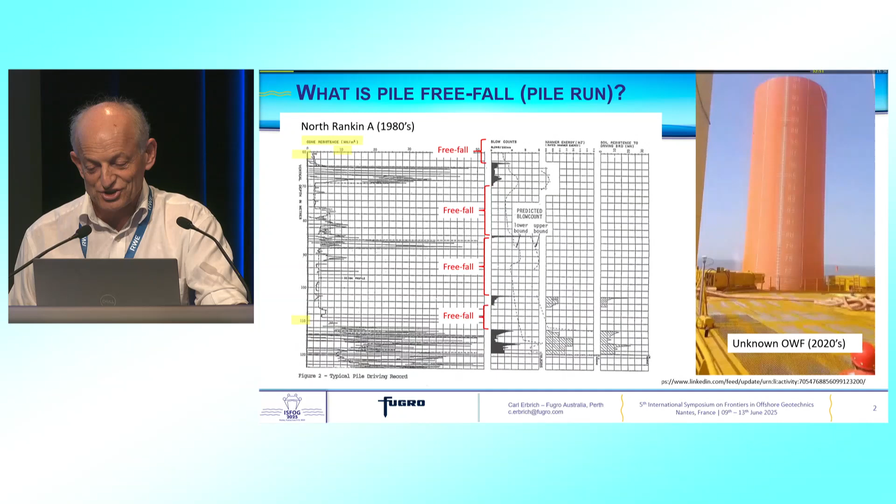Plus, of course, more recently we've been having these monopiles. Now, I don't know where this one is - it just appeared on LinkedIn without any reference. So I'd be fascinated if anybody knows where this one is.

Of course, we've seen other pile runs as well. This one was presented - I think a couple of papers mentioned this, one just a few minutes ago, and also one yesterday, which I've just borrowed these slides from. This was sort of not a free fall in a sense, it was more like a dropped pile, but it was essentially the same mechanism where a pile was unintentionally released and it went in an awful long way further than people would have expected if they just looked at a standard SRD.

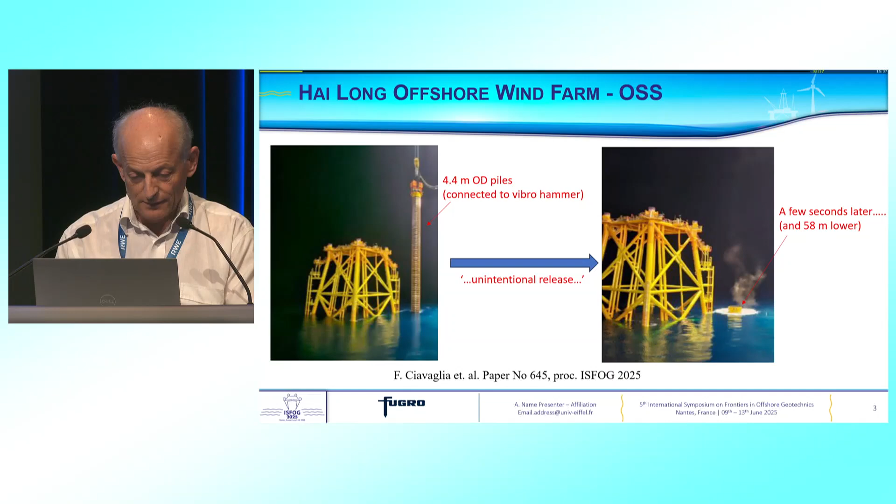So why do piles free fall? Isn't it obvious at the end of the day? Well, if we've got a strong layer overlying a weak layer and the strong soil can support the pile but the weak can't, then we go to free fall. Once we've managed to penetrate through this hard layer, it will drop from there. And in essence, this is very similar to what you might get with a punch through on a spud can.

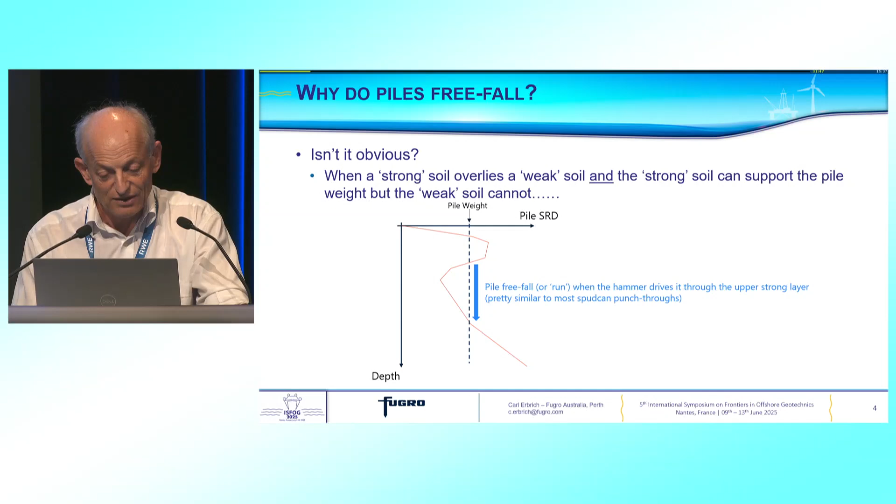So it's nothing difficult. It should be reasonably easy to identify, and it should be reasonably easy to address as well. But then we get to the more interesting situations, which is like this.

If I were to show you these in the abstract, there's no axes deliberately, they're conceptual sketches, but I've given you here 3 different CPTs. If I just gave you those CPTs and asked, do any of them look like a free fall will occur? You'd probably say, well, no, they're all increasing with depth, why would I get a free fall? But I've given you a clue here: this one, no, this one, no, but the one in the middle, yeah, maybe.

And the one in the middle is because it's a partially drained response. A partially drained response in a CPT is basically going to mean a transitional soil, which means a silty sand, a sandy silt, or a silt. So if you see those words anywhere in your profiles, they're the sorts of things that should be your first warning to start looking.

Now, in the real world, we don't tend to get nice, simple, straight lines, particularly in a transitional soil. It's more likely to be a wiggly blue line like this, going up and down. It will have some low points and some high points. But ultimately, the lower points will be more likely to be the more undrained parts of that profile, and the higher points will be the more drained. And of course, CV can vary dramatically, so quite small variations can lead to quite variable responses.

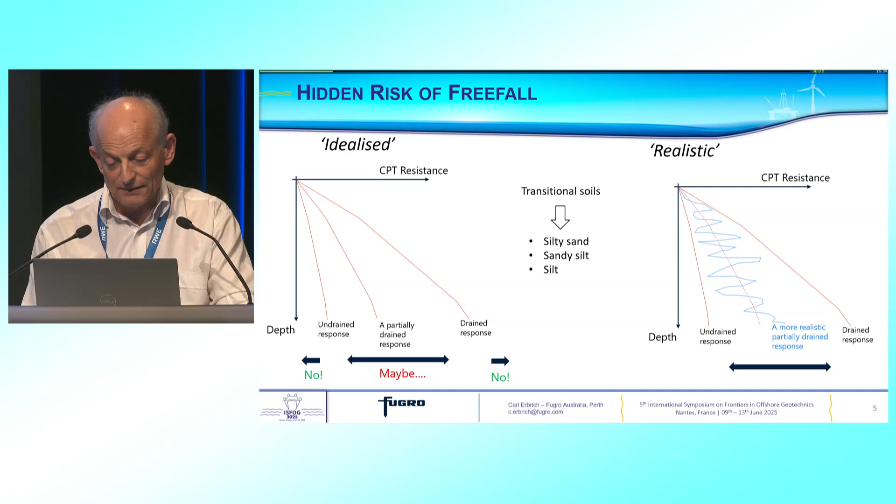So that's more likely to be what we'll actually see. But still, there's a net increase with depth, although there's some highs and lows. So let's go through what a traditional thinking of what freefall might mean on this sort of profile.

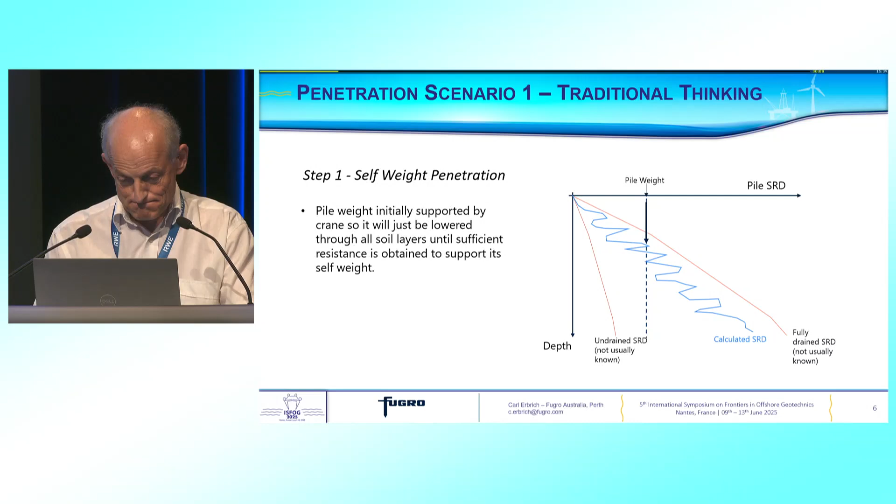So firstly, if we look at self-weight penetration, well, we would lower the pile, it would reach the point that we see here, and it should stop. Now, that looks pretty a precarious point, I have to say, but that's what it would happen.

Now, if you added the hammer weight, which is going to add a lot of extra weight, well, straight away, it would drop through there, so you'd get a very small free fall, and you'd say, well, so be it. Maybe with a bit of dynamics, it might go a bit further, but still, there's a bit of a significant increase, so it should just drop a small distance and then stop again.

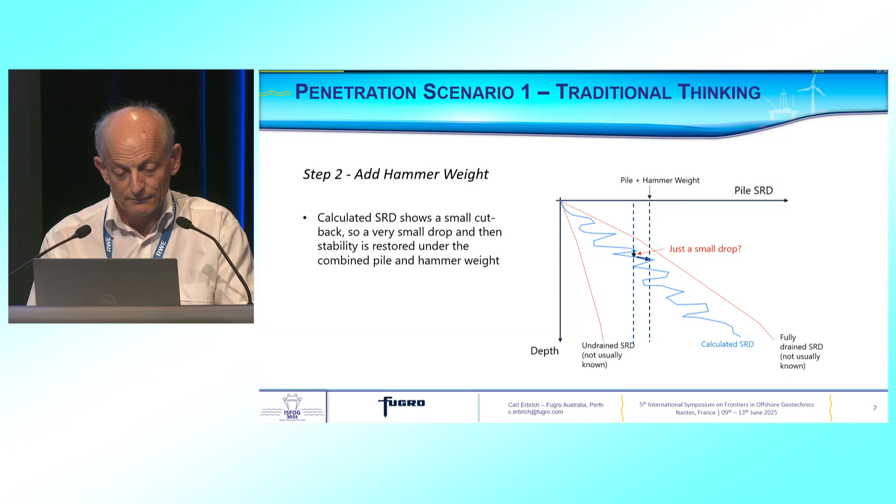And if I carried on, just driving the pile as I ordinarily might drive the pile, you might think, well, there'll be a little small drop here, and then it would stop again, and another small drop here, and then it would stop again. And so be it.

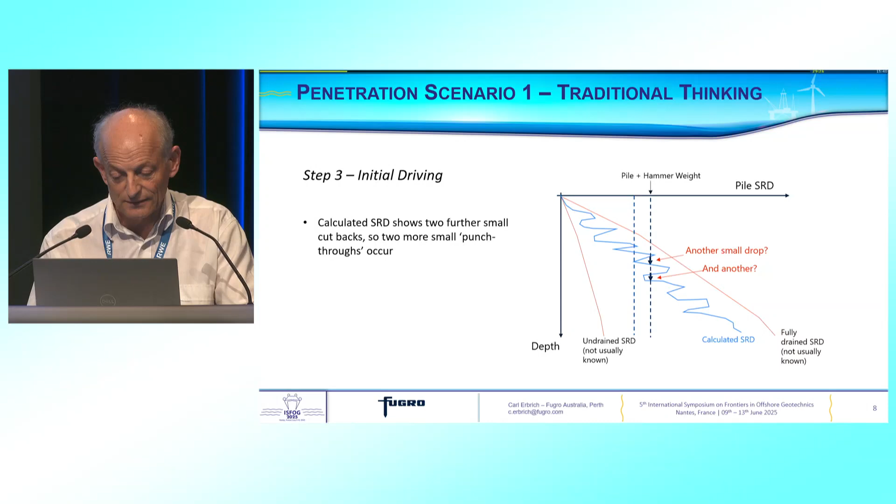And then after this point, really, what's the hazard? The pile and hammer weight is pretty much always below the resistance that we've got once we've got down to this point here. So thereafter, we should just be able to drive nicely into the ground. The calculated SRD is always higher than our resistance, so it should just be a normal operation.

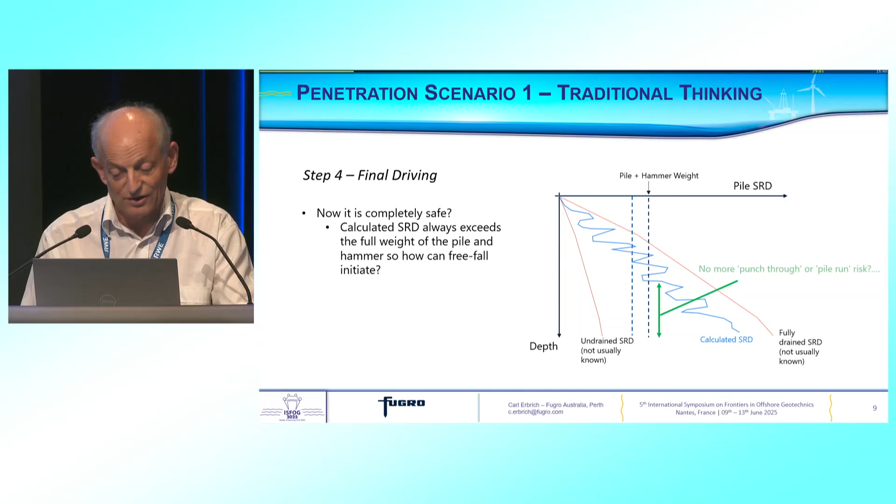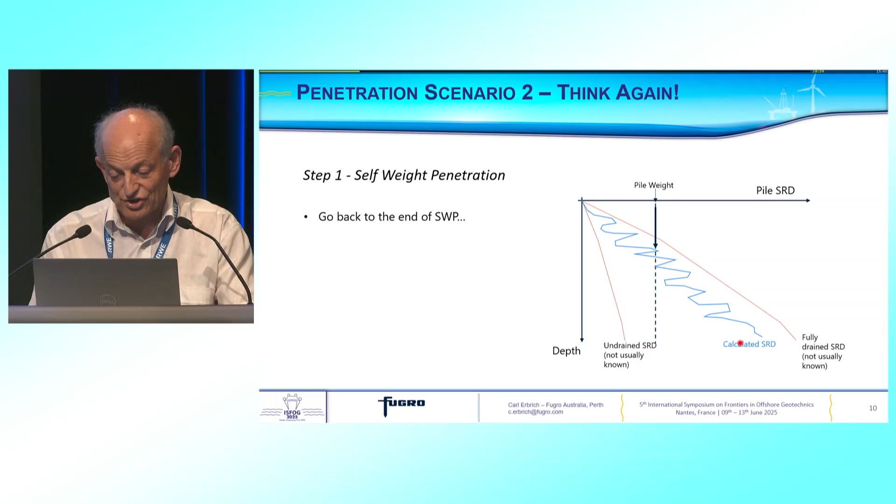Well, maybe not. So let's think again what could happen. So let's go back to the end of the self-weight penetration phase, and remembering that we are dealing with different resistances for undrained at this end of the spectrum and drained at this end of the spectrum, and then in the middle we've got our partially drained, which is going up and down a bit.

So now if we add the hammer weight, what's going to happen? Well, actually, instead of that small drop that I showed you before, that could happen if we get lucky or if we do it slow enough.

However, as we add the hammer and the pile starts to move down, we'll get an increase in the pile velocity. And when we get an increase in the pile velocity, if we're in the partially drained space to start with, then increasing the velocity will change the drainage conditions to a more undrained state. And as we move from a more drained state to a more undrained state, in most cases, that means that the resistance will reduce.

And once the resistance reduces, that means there is now even less resistance available to support the pile than we had before.

And hence the pile moves faster and the resistance reduces more. We're basically in a nasty positive feedback loop, where every bit of speeding up of the pile means that the resistance reduces, and ultimately you get a catastrophic situation with the pile dropping uncontrollably.

And the pile doesn't just carry on dropping uncontrollably till it's hit one of these little bumps in the profile. It is dropping uncontrollably until it goes down to intersect with the undrained resistance, and then some, because by that stage it's flying down at a great velocity with a lot of energy, so it needs extra time to pull up. So it's going to end up penetrating, more likely than not, deeper than this undrained SRD, which is potentially much lower than what you started with, and certainly much lower than a drained SRD.

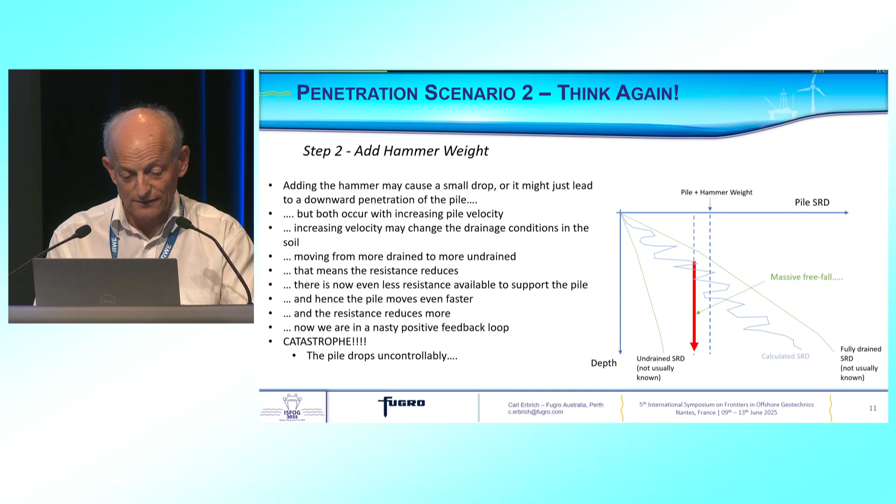So just in a conceptual space, what does that mean? We know we can have graphs with VD on CV - we've seen these going back many years now, probably a couple of decades since this sort of concept was first explored. We can treat that in terms of cones, and we can treat it in terms of pile wall thickness.

We can also treat it in terms of pile shaft resistance as well. All of these have a sensitivity to drainage. So up here we have our CPT, or pile tip resistance, or even our pile shaft resistance, and as we come along we basically run down this curve. So effectively, if we start in this position, we're going to run down, and we're going to fall down the hill, and the only safe space is when we get to the bottom of the hill.

So basically, we're safe against free fall if we're in the undrained space. We're safe against free fall if we're a long way back from the edge of this escarpment, because even if we speed the pile up during normal operations with hammers and lowering and whatever, we'll stay in a safe space. But if we start off quite close to the edge, then we can drop away.

And indeed, this might be one of the most dangerous areas because our CPT might look drained, and in reality it might be drained, but it may only just be drained. So again, you're looking for the silt content. If there's silt content and you're just about drained, then that might still be dangerous.

If you're already well down this chart, well down this slope when you start, the drop is smaller. It's still substantial, but it's smaller. So the closer you are to the bottom of here when you start, the better, or being a long way back from this edge - those are the spaces we want to be.

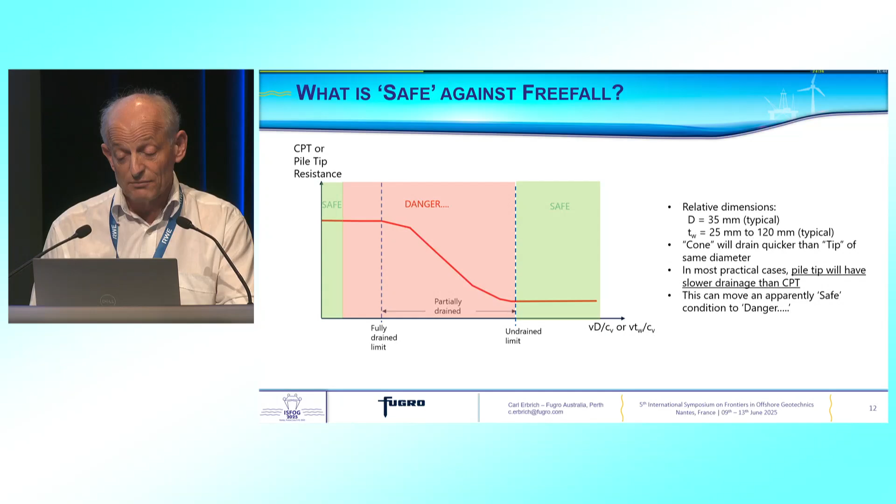So even if our CPT says the situation is drained, in reality our pile tip may start off in a more dangerous position. And this can move an apparently safe starting condition to a dangerous condition.

Now, I've seen around, written in various, mostly LinkedIn blogs, people talking about liquefaction. I had a discussion with someone a couple of days ago that suggested liquefaction is a part of the mechanism. I really don't think liquefaction plays a significant part in what is happening with pile freefall or pile runs.

So let's just revise ourselves what liquefaction means. There's two types of liquefaction. We can have flow liquefaction, which basically occurs when you either have a monotonic response, a stress strain curve that goes up and reaches a peak and then drops away very quickly, and can drop away in the most extreme situation to virtually no strength at all.

And I don't know if you've ever seen, there's some amazing videos online of flow liquefaction events involving dams failing in Brazil, and there is an extraordinary one of a city almost floating down a hill in Indonesia, which is quite extraordinary. It literally looks like it's going down a river.

Well worth checking out if you want to see flow liquefaction. Flow liquefaction can either be triggered statically, or you can trigger it by a few cycles of loading, which bring your strain over, and you intersect here and you drop away, and then it's all over.

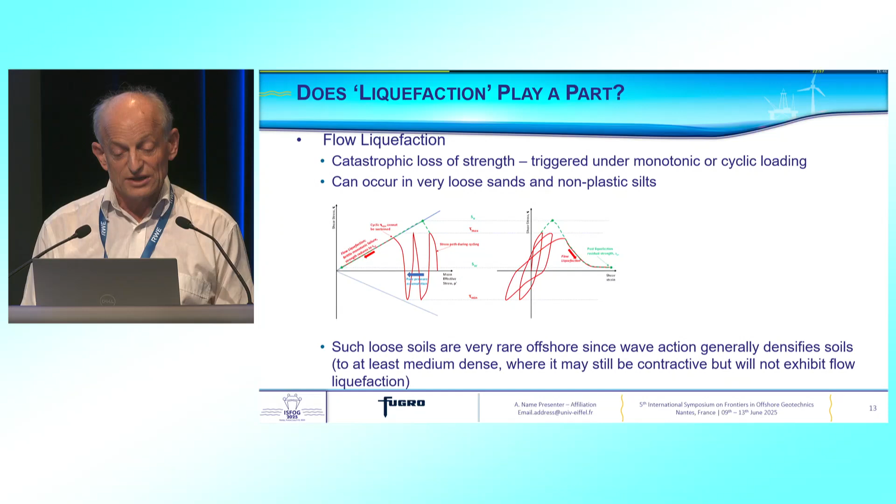That might sound tempting, but the problem is that this only occurs in very loose soils, and loose soil is very rare offshore, since wave action will generally densify soil to at least a medium dense state, not necessarily very dense. In the North Sea it tends to be very dense, but elsewhere we're seeing more medium dense soils. These may still be contractive in the undrained space, but they won't exhibit flow liquefaction where we lose all our strength to virtually nothing. But that can be triggered statically, so it could be relevant in such soils if they existed.

Then there's the more common type of liquefaction we worry about offshore: cyclic mobility. This is where we put cycles onto our soil and have a loss of soil stiffness over a limited strain range, but ultimately the soil strength recovers at large strains. As we cycle the stress-strain curve, it softens to a zero state, which occurs when the stress path goes through this zero state. But it retains dilated capacity such that when you shear it back up again, you still get a high strength.

Now, this mechanism may play a part in triggering a freefall, but it can't really play a part in propagating it, because ultimately, to propagate a freefall, it's a monotonic process. We are free-falling into virgin soil, mostly.

So where we can see a triggering part is that if we're driving in a cyclically liquefiable soil, such as carbonates we have in Australia, or indeed Taiwanese silts, which have become infamous, then you can get an increase in pore pressure with each blow. That will reduce the effective stresses at the pile-soil interface, and this will contribute to initial freefall triggering of the interface degradation.

So we can get gradual degradation. For example, we may have put a pile in, it may have stopped, and then we get some setup. As we start hammering it, it looks pretty solid, but each blow is actually generating pore pressure, and then we'll get to a point where there's been a reduction in effective stress, enough to trigger the freefall.

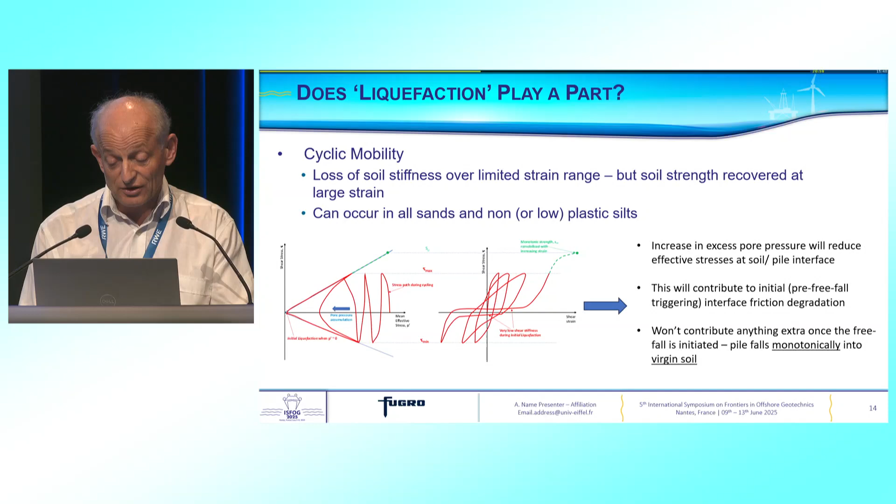But if that was all that was going to happen, it wouldn't freefall very far, because it then moves to a static process going into virgin soils. So it won't contribute anything extra once the freefall is initiated, because in that case the pile is falling monotonically into virgin soil.

However, on the other hand, we have soil remolding. Now, soil remolding we know about in terms of clays, and in carbonate soils we have extremely high sensitivities. So very sensitive soils can remold to very low strengths at large strains. And we need to differentiate here remolding, which is a process where we get low strengths at very large strains, whereas flow liquefaction is something that occurs at much smaller strains.

So actually they look similar. They're both post-peak strain softening materials, but remolding requires large strains to propagate down to very low values, whereas flow liquefaction is essentially an instability that just drops away instantly.

So yes, flow liquefaction is very unlikely to be contributing to freefalls, but remolding and very high sensitivity soils are definitely contributing. And anywhere you see liquidity indices close to or greater than 1 should really be a red flag straight away, because a liquidity index greater than 1 means your remolded strength is probably only a couple of kPa or so.

So we can conduct fall cone tests in fine-grained soils. That's a good test to work out your soil sensitivity in such soils. But then we have the challenge, what about sands? What is even the concept of remolding in sands? We don't necessarily see it in the normal sense of the word. However, when we drop a pile very fast, we get dynamic effects, and then indeed we can have essentially remolding.

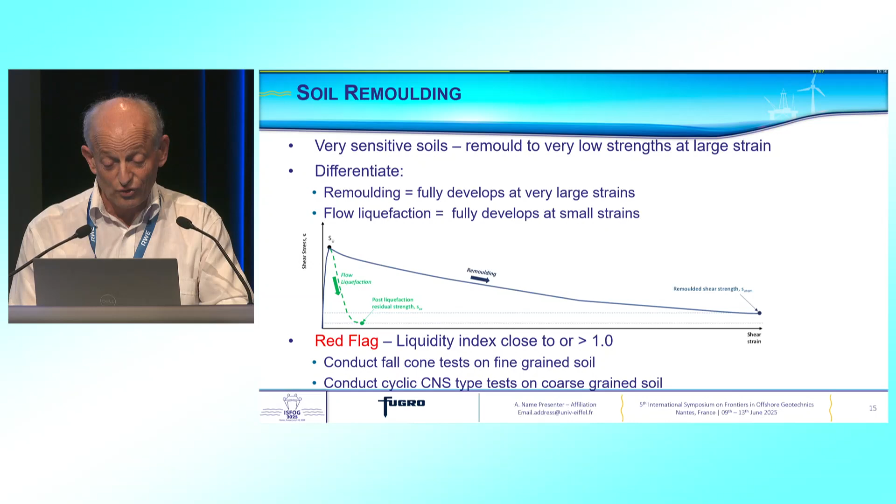So there's some basic ideas about the sort of things to look for. Now I'll talk about modeling of freefall.

There's been a few different models. I think basically they're all the same models I've seen in this conference so far, but there's a couple of differences in what we're doing.

Now, why do we need all that? Well, the reason we need all that is because the sort of piles we have, and indeed even the monopiles that people have been using here, do have some restriction of water flow out the top of them.

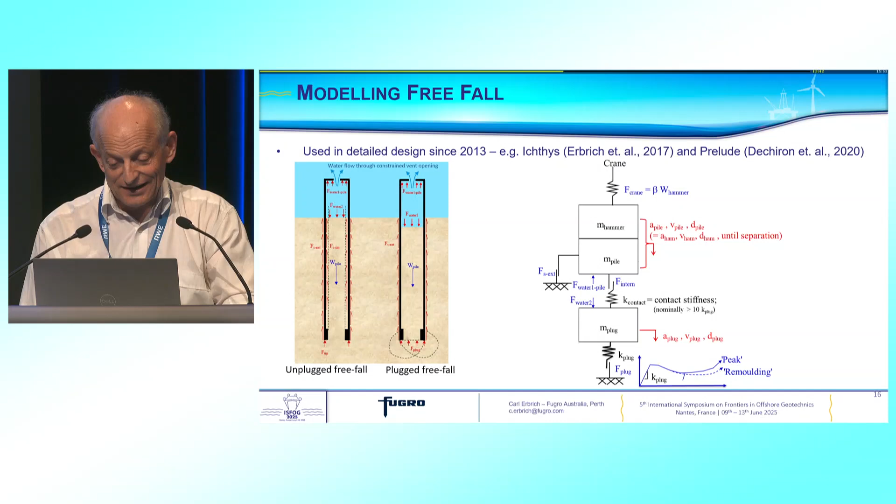We've used this model in detailed design since about 2013. There's a couple of papers, Prelude and Ichthys, which have been in conference. So I have mentioned freefall previously in a couple of examples, although it's only been a sort of a little background topic. Before that time, I don't know what people were doing, to be honest. For NRB, for example, I think there was some simple counts done, but we didn't do them.

We included it for a job we were doing at the time, where we explicitly incorporated this influence. And in very more recent times, following the Taiwanese situations, we have now also essentially incorporated the same process for shaft friction degradation as well.

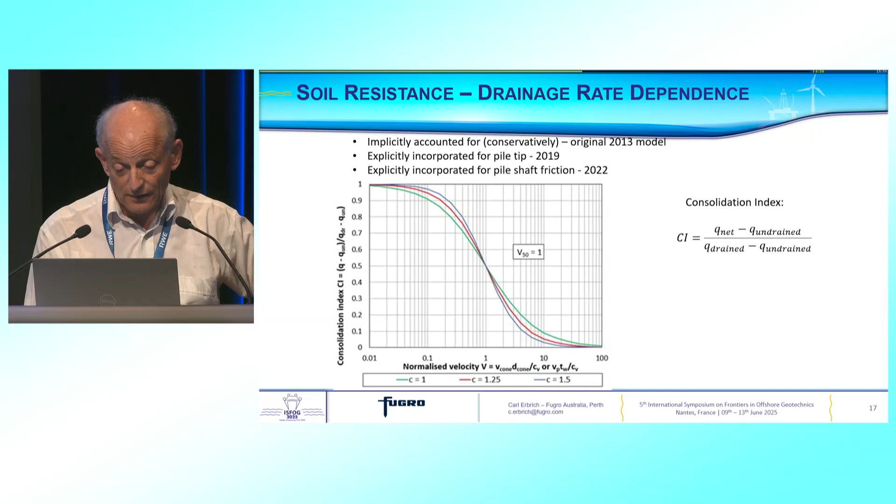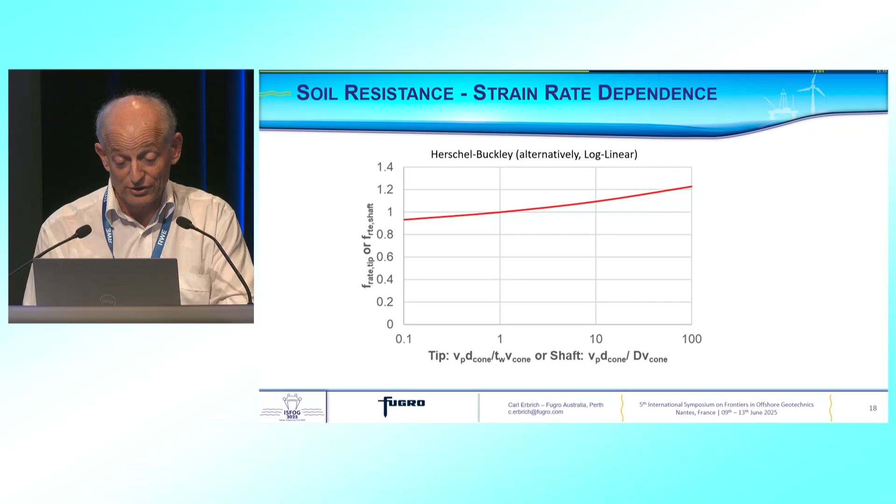We also incorporate strain rate dependence. Sometimes we've used a log linear model, sometimes the Herschel-Buckley model, and it does tend to give you maybe a 20% increase for the end bearing, not such a big increase for the shaft friction. Actually, it can even be a decrease for the shaft friction because of the scale involved.

So let's go to our first example case. This is a monopile in silty soil, essentially a Taiwanese example. This is not a real soil case - we do not have permission to use people's data, but this is a synthetically created profile.

It's in 25 meters of water. In-air weight is about 13.4 meganewtons, and then there's a hammer and sleeve weight of about 5 meganewtons in air on top of that.

And okay, you might ask, well, what's the basis? I keep pressing that wrong button - hold on, sorry, I need to get better control of the buttons here.

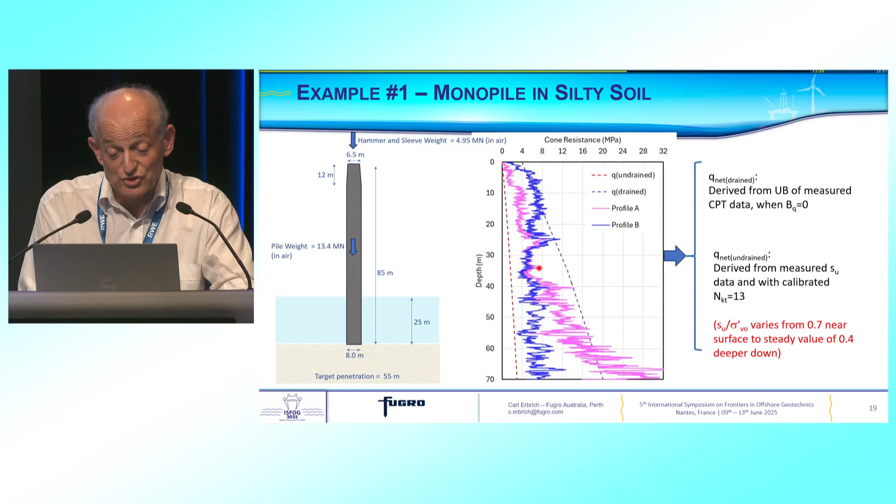Then we've got sleeve friction profiles as well. These are really defined by looking at the peak skin frictions that we use, derived from the CPT sleeve friction. So we've drawn an upper bound line to derive the more drained end of the spectrum and a lower bound line to derive the more undrained end of the spectrum.

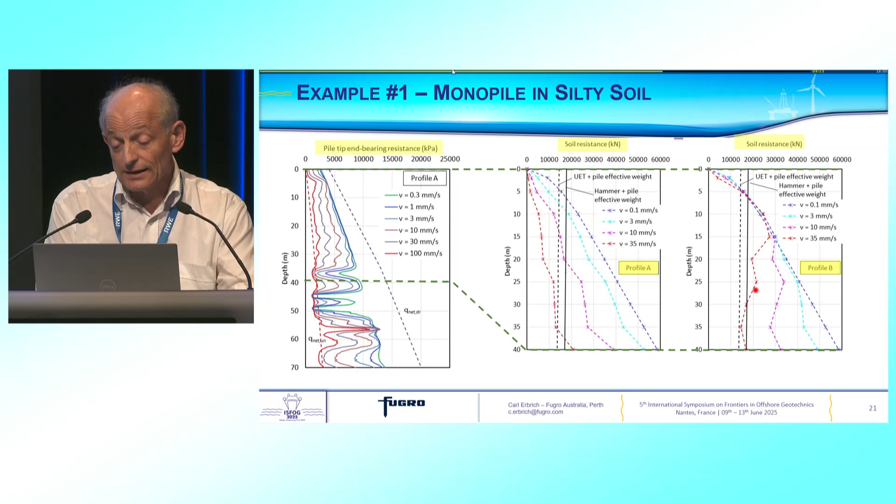That then translates into actual overall soil resistance, including the skin friction. Here we can see different velocities, and here our starting profile: the pile and upending tool weight, and then the hammer and pile weight. If we just looked at these on their own, you'd say, well, as long as I follow one of these lines, all should be good, because they're all increasing with depth. That's profile A. This is profile B, which does have some reductions with depth, but still in this area, all is good apparently, because we just keep following these lines.

If we actually run an analysis with just a very small initial velocity given to these profiles to get them started, this is what we end up with. Profile A, which was softer at the top but stronger at the bottom, actually goes faster, reaching almost 15 meters a second, and about 7 seconds later comes to a halt. Profile B goes a bit slower, 10 meters a second peak, and after 9 seconds it comes to a halt. Interestingly, the embedment depth for both is quite similar - this one is just over 70 meters, this one's 70. Then for profile A, which goes just below 70 meters, we can see the various reaction forces we've got.

The effective pile weight actually reduces as we go down, because as the pile starts up, a lot of it's above ground, and the submerged weight reduces as more pile becomes submerged below the water level. The total soil resistance is here - it goes up, with a dynamic spike, coming to a halt about here, and various little things going on. This is the shaft resistance component, and this is the tip resistance component. As it comes to a halt, the resistance drops.

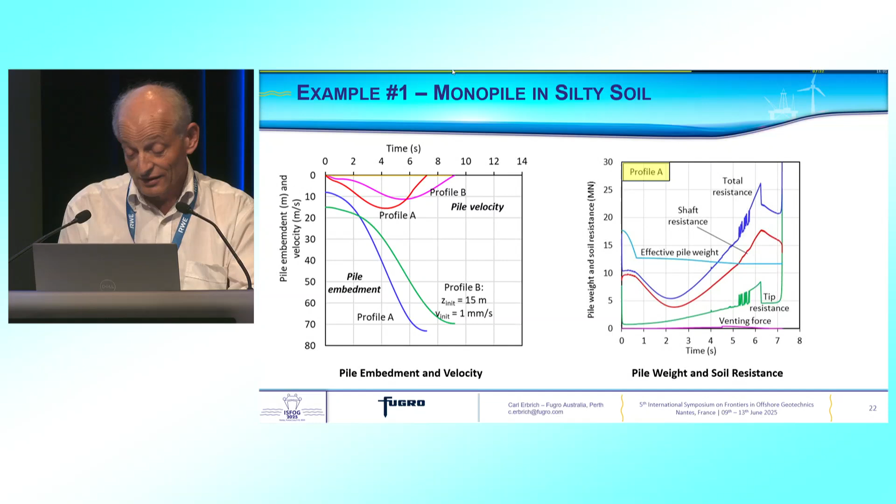I did check this earlier because I realized this drops below 70 meters, and we slightly missed that - we actually have a slight reduction in our cone resistance at 70 meters. So it doesn't make a lot of difference, but it does explain why there's a rather sudden drop here. There should be a drop because the pile is coming to a halt, but it's also dropping because there's a lower cone resistance just below 70 meters than you saw on the previous plot.

This is how the sleeve friction, the pile friction, varies. With the Alm-and-Hamre model, you can see we have the friction fatigue coming in, and there is obviously a high value near the tip, but it very quickly drops down to very low values with significant degradation. These low values are well below the undrained sleeve friction because of this degradation, the remolding process that's going on. Over on this one here, we can see...

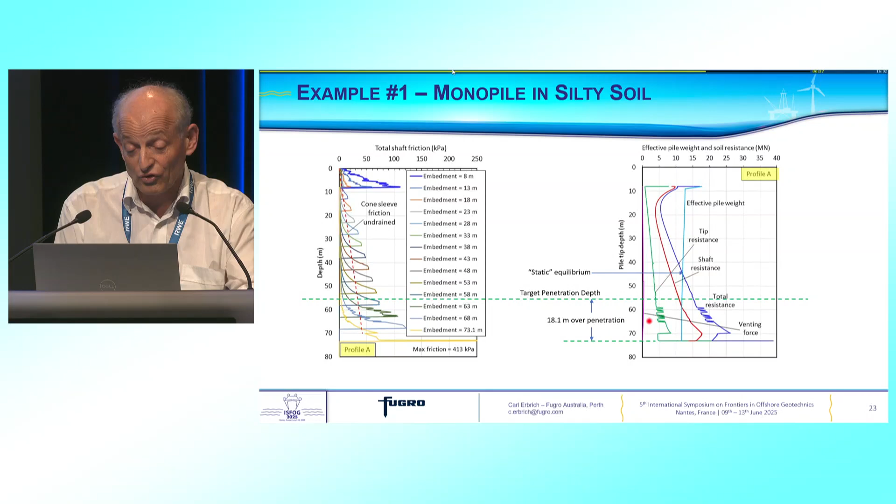Essentially the same plots as we saw in the previous graph, but now plotted versus depth rather than time. So the static equilibrium point is around 45 meters if we were actually following this curve. But as it turns out, our target penetration in this case was 55 meters, and we've ended up at 70-odd meters, which is 18 meters below the target. So this particular case would have been a bit of a problem, to say the least.

So, moving to free-fall arresters - various types of free-fall arrester have been proposed.

Most of these are based on what we call the water brake principle, which is, as I said, stopping the water flowing, restricting water flow out of the pile.

This is an example type where we had a floating plate. The reason the plate is floating is it's actually free to ride between two brackets. It had neoprene bumpers on it. The reason for that is because if you put something like this in the middle of a pile and try to drive it, the astronomical driving stresses would be impossible to deal with.

But by disconnecting the plate and having it free riding, when you hit the pile, the plate basically gets left behind and the pile will go down, and then the plate will slowly go down and land on the bumpers. That just keeps going, bang, bang, bang. But it's much more gentle than trying to drive that plate down on the water.

Whereas when the pile free falls, it works the other way around. The pile runs away, the brake gets left behind, and then it crashes up against the upper bumper, and then it drags the whole plate down, and it operates as a free fall arrestor.

We use these sorts of things in Australia all the time. There are various variations on the theme. But one thing, as far as offshore wind is concerned, is it's not going to be very effective in shallow water, because most of the pile is above the water.

We did run a case with a Taiwanese example, and to be fair, it did pull up a pile that otherwise would have disappeared, never to be seen again, but they didn't have these systems, so it was more of an illustrative case. Obviously this does add extra cost and time, so if you can get away without using it, that's fine. In Australia, we really have no choice, because as you'll see in the next example, we have even more extreme conditions.

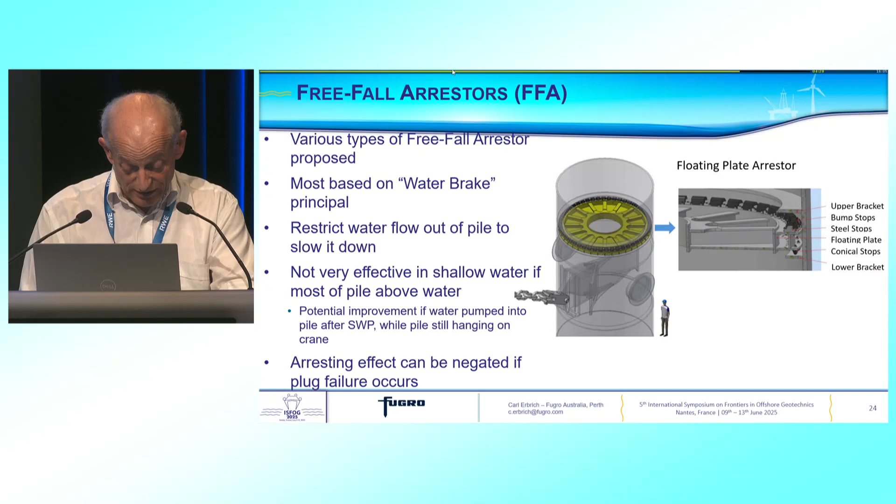So there is a potential improvement if you could actually pump water in to build the head, a bit like the positive head idea I had in the previous talk before lunch. But that was for something completely different. Pumping in enough water is probably going to be rather a slow process, so it may not be very practical either. And also the other problem is the arresting effect can be negated if plug failure occurs.

So that is where we get to our second example, carbonate soil with a free fall arrestor. This one is a 140 metre long pile. It's about 1 meganewton of submerged pile weight, 145 tonnes in air. We've got a pile and free fall arrestor weight of 5.5 meganewtons, 644 tonnes in air.

So we're going to drop this pile. It's got a closure at the top, so it's got a CD times A vent of 0.32 square metres. CD is the discharge coefficient, and A vent is the actual area of the vent. There's some uncertainty about that number, so that's a hydraulics question. We tend to lump this together and then ask the hydraulics people to work out what that should be, depending on the particular hydraulic configuration of the free fall arrestor, which may vary.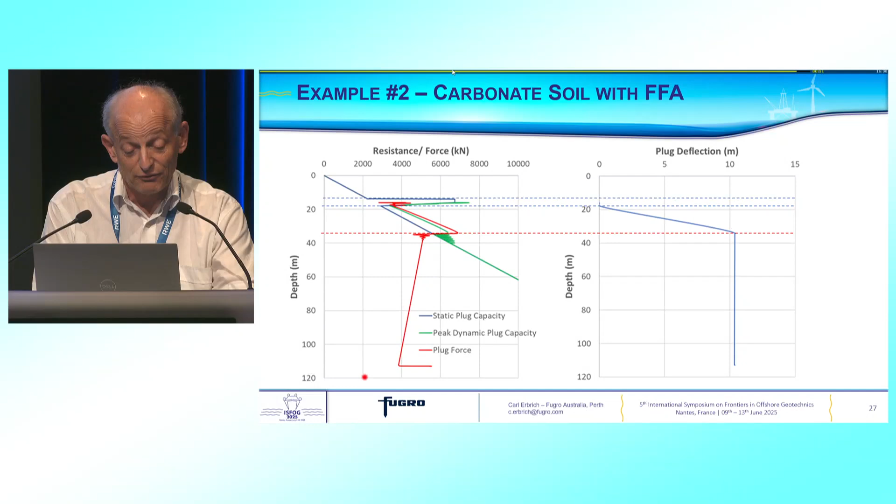And eventually the plug force gets lower than the forces of the capacity, and then the plug fails no more, and all is good for the rest of the free fall.

So other free fall mitigation measures we might have: self-weight lowering the pile as fast as possible moves the penetration to the undrained safe zone in silty soils. Now that's the first thing I would be trying. Might be limited by vessel stability and lowering capability, but I was told the other day of a case where this was done and it worked perfectly, so that was very nice to hear.

Clump weight tool, push in the pile, only suitable in very weak soils, e.g. some Australian carbonates. It has been done. I'm not sure I'd recommend it.

Increase the pile end bearing. This may not be sufficient on its own to eliminate freefall, but can be used to avoid over-penetration. This is an example of the sort of geometry we've used in structures, putting in cruciforms and trying to line them up with stronger layers to give us a lot more resistance - essentially try and make the pile plug.

Vibro driving or vibro jetting, although only in non-cohesive and uncemented soils, and don't drop the pile, as we saw in that example earlier, which was a case where the vibro piler managed to drop.

Another possibility is to try and tie the hammer and pile together with tight slings, although maybe our installation friends might have nightmares, because ultimately you've got to avoid snatch loads overloading the crane and rigging. But that also applies for vibro driving as well, which I think is that pile sliding that was talked about in the previous talk.

So yes, tight slings - they have to be pretty tight, because otherwise you will get horrendous snatch loads, but I don't think it's outside the realms of possibility to come up with an arrangement where they could be tied together.

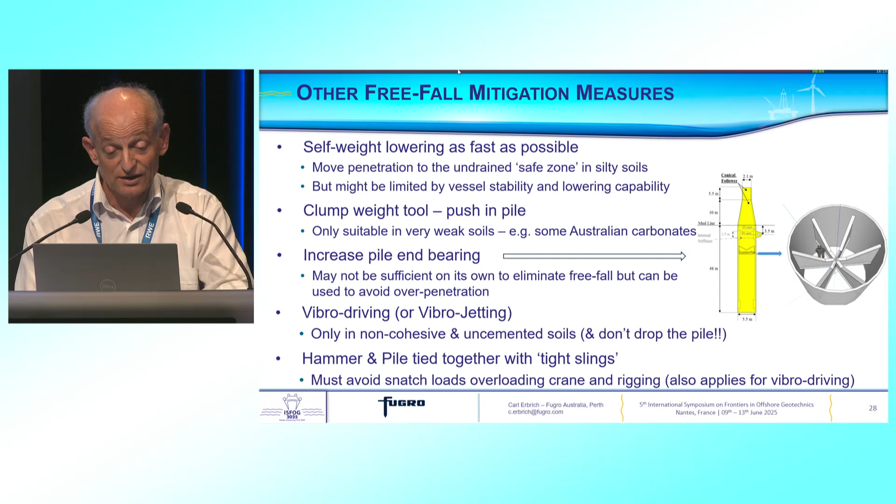So conclusions: pile free fall or pile run, it's not a new thing, and notable examples date back to the 1980s, particularly in carbonate soils. Recent rapid rollout of OWF into previously uncharted areas is revealing some surprises, and particular caution is required whenever you see weak but silty soils.

And the paper presented the soil mechanics of freefall with a strong focus on drainage transitions that occur during such an event, and a comprehensive modelling strategy that allows the risks and consequences of freefall to be reliably assessed. We've also looked at various freefall mitigation measures and some modelling of them, and they've all got pros and cons - there is no one-size-fits-all.

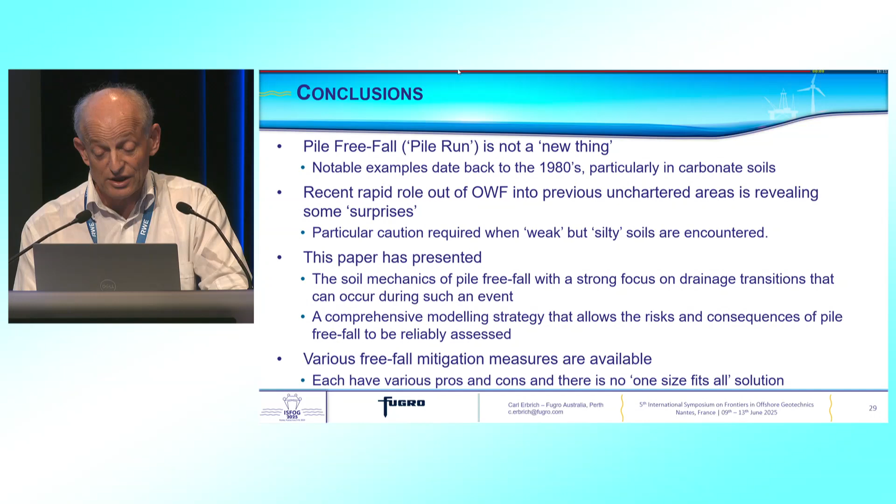So let's see - we'll end up on just one more video of a freefall, because we all like videos of freefall because they're fun. And that will be it, I think, after that.